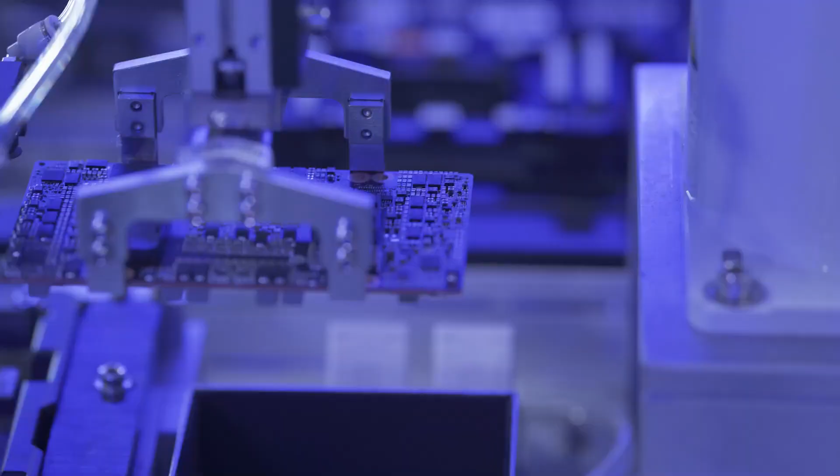Today, we're diving into Nvidia's unexpected push to build AI supercomputers and humanoid robots right here in the USA. Why is this such a big deal? Because these computers or robots aren't going to be built in China, but in the USA.

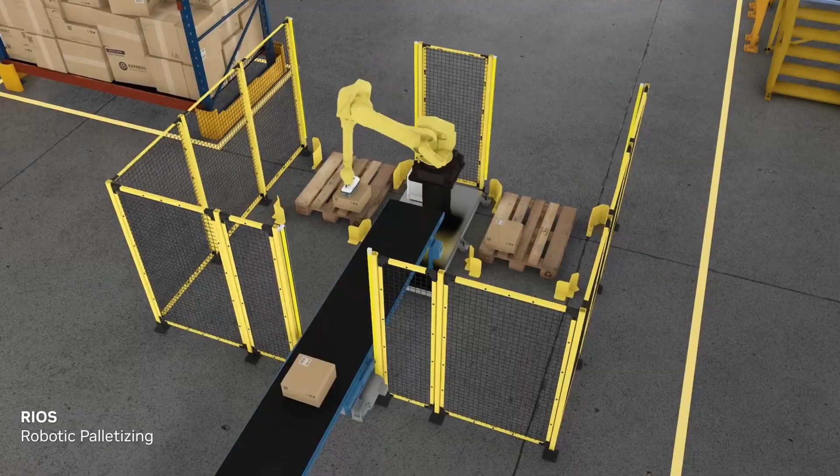Nvidia's AI supercomputers are the engines behind the world's most advanced artificial intelligence. And their humanoid robots are designed to work alongside us, not just in labs, but in real factories, offices, and maybe even homes. This move is about more than technology. It's about economic security, job creation, and global leadership.

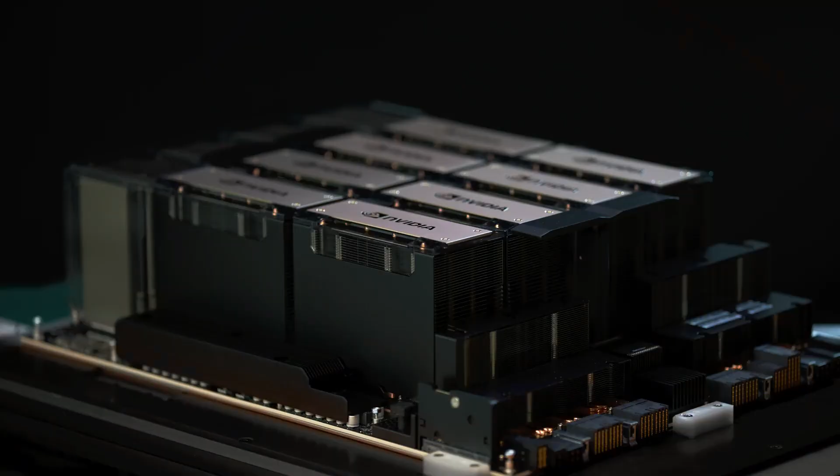Nvidia's plan is expected to create hundreds of thousands of jobs and drive trillions of dollars in economic activity over the coming decades. And for the first time, the engines of the world's AI infrastructure are being built on American soil. So what exactly is Nvidia building?

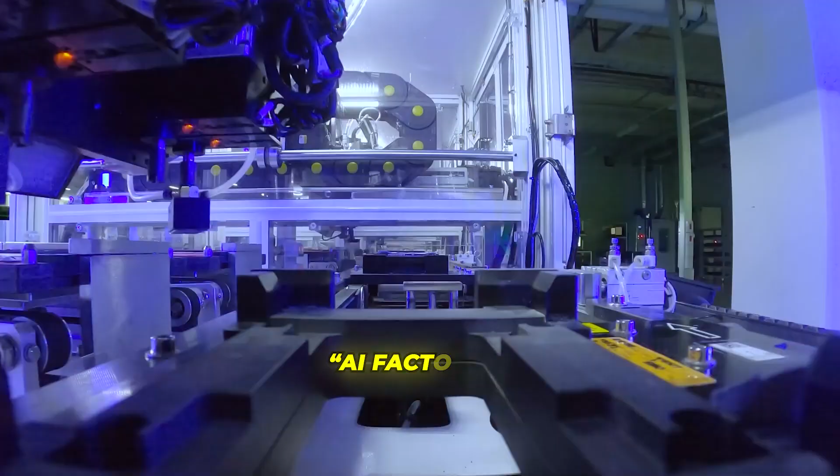Let's break it down. Nvidia is constructing massive manufacturing plants in Texas and Arizona. These aren't your average factories, they're AI factories, designed from the ground up to build and test the world's most advanced AI chips and supercomputers. We're talking about over 1 million square feet of manufacturing space, with mass production ramping up in the next 12 to 15 months.

These AI factories will use Nvidia's own advanced robotics and digital twin technologies. Imagine a factory where every process is simulated in 3D before a single machine is turned on. That's possible thanks to Nvidia's Omniverse platform, which creates digital twins, virtual replicas, of the entire factory. This means faster, safer, and more efficient manufacturing.

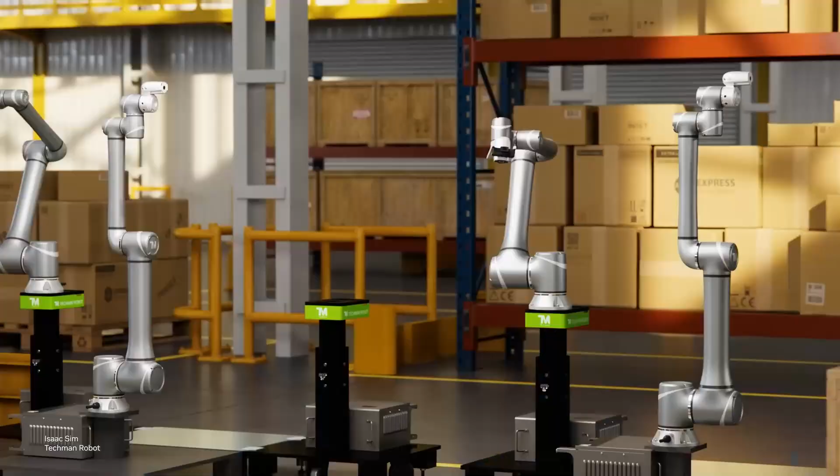But here's where it gets even more futuristic. Nvidia is using its own AI-powered robots to help build these factories. That's right, robots building the places where more robots and supercomputers will be made. It's automation on a scale we've never seen before.

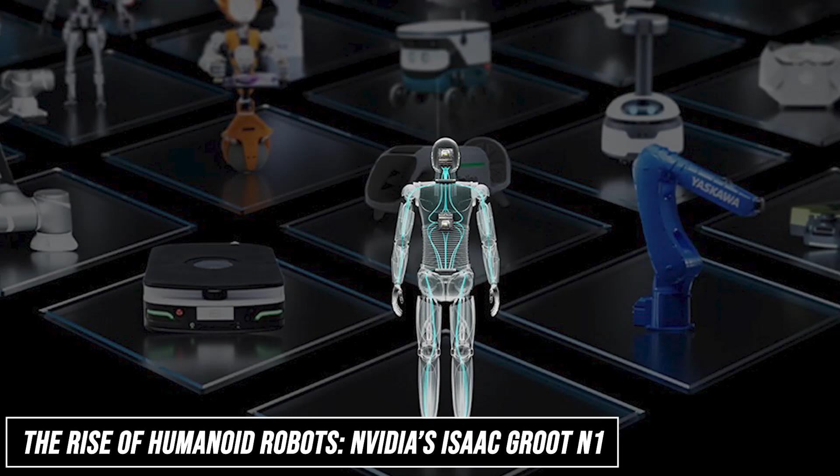Now let's talk about the stars of the show, humanoid robots. At Nvidia's recent GTC 2025 conference, CEO Jensen Huang unveiled the Isaac GR00T N1, pronounced Groot, the world's first open, fully customizable foundation model for generalized humanoid reasoning and skills.

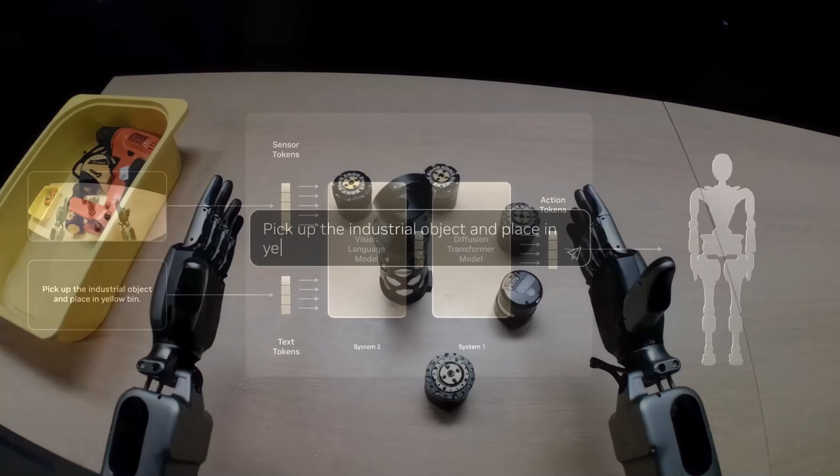What does that mean in plain English? It means Nvidia has created an AI brain that can power robots to learn, adapt, and perform a wide range of tasks, just like a human. This isn't a one-trick robot. It's a generalist, capable of everything from picking up objects to tidying a room and even performing complex multi-step tasks.

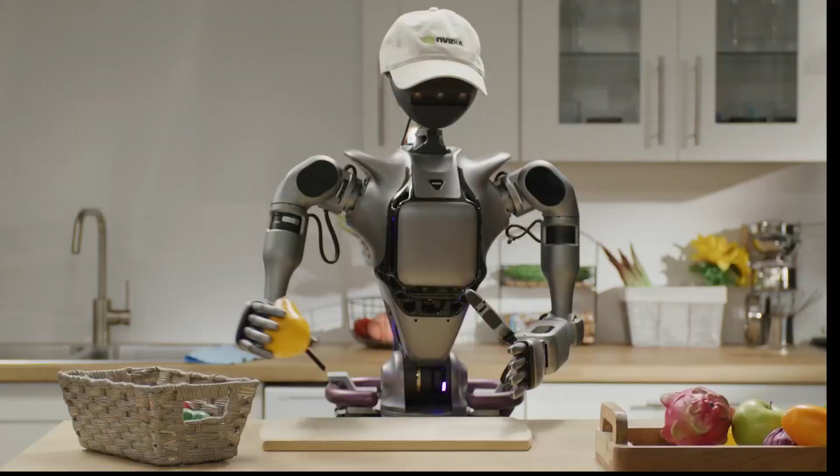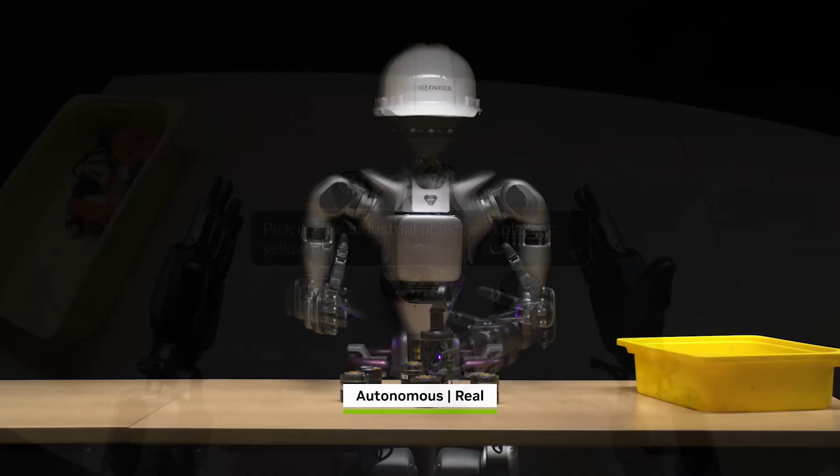The Isaac GR00T N1 model is inspired by human cognition, with a dual system architecture for thinking fast and slow. The slow thinking system gives robots perception and reasoning skills, helping them decide the right actions to take. The fast thinking system translates those decisions into smooth, coordinated movements.

This model is open and customizable. That means developers and companies around the world can use it to build their own robots, tailored to specific industries or tasks.

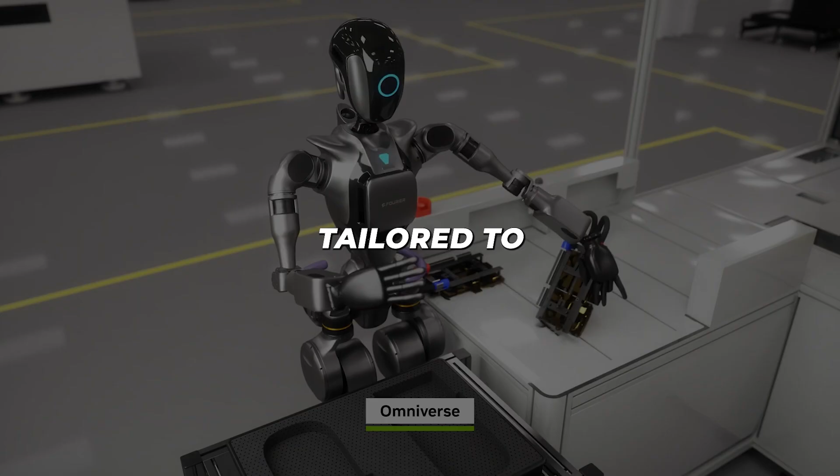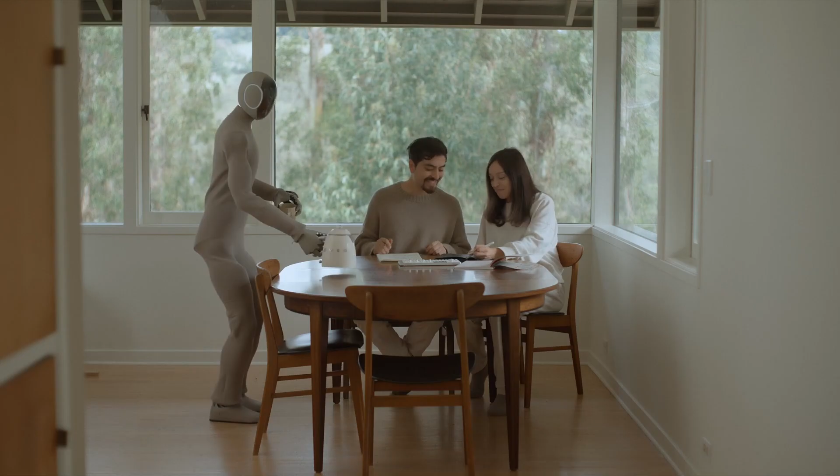So what can these robots actually do? At the GTC 2025 showcase, Nvidia demonstrated robots powered by the GR00T N1 model performing real-world tasks. One robot, developed in partnership with robotics company 1X, autonomously tidied up a room, picking up objects, organizing them, and even transferring items from one arm to another.

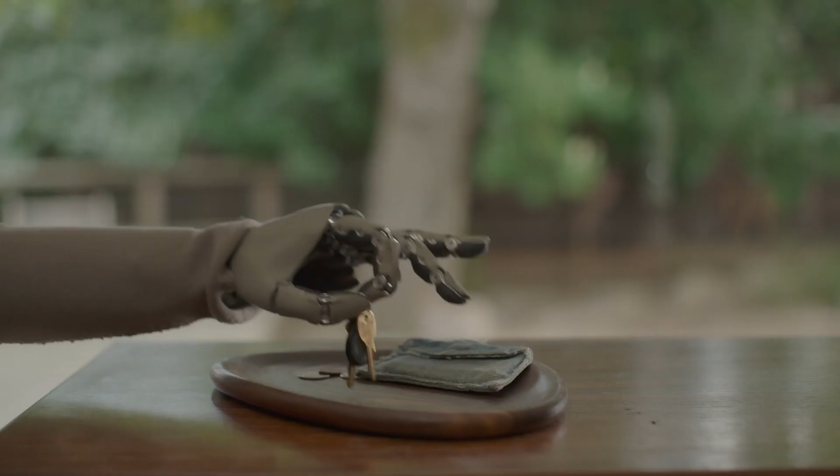But it doesn't stop there. Nvidia's robots are being trained to handle everything from material handling and transport in factories, to precision welding and even domestic chores. The goal is to create robots that can work safely and efficiently alongside humans, taking on repetitive, dangerous, or physically demanding tasks.

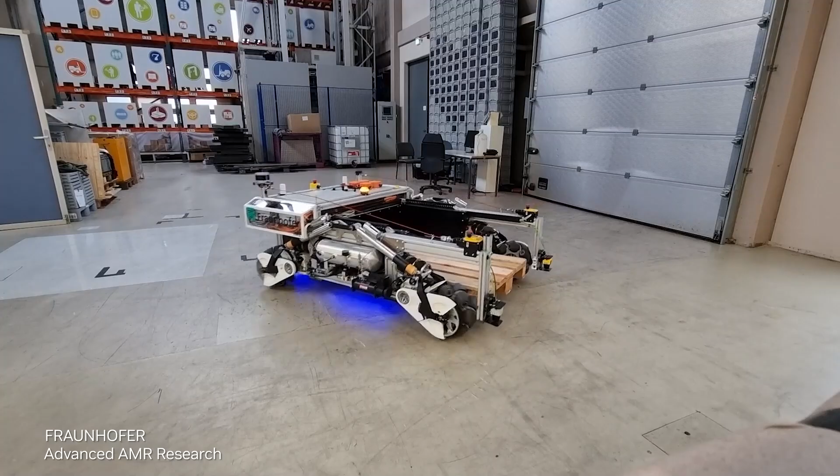And thanks to Nvidia's Cosmos platform, these robots can learn in hyper-realistic digital environments before ever setting foot in the real world. Cosmos generates synthetic data and simulates millions of scenarios, allowing robots to practice and perfect their skills virtually. This means faster training, fewer mistakes, and robots that are ready for prime time.

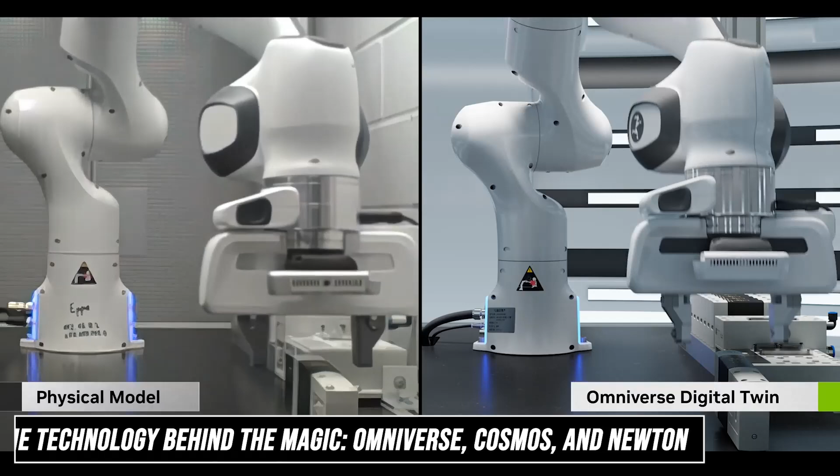Let's peek under the hood at the technology making all this possible. First up is Omniverse, Nvidia's real-time 3D collaboration platform. Omniverse is used to create digital twins of factories, robots, and even entire cities. This allows engineers to design, test, and optimize everything in a virtual world before building it in reality.

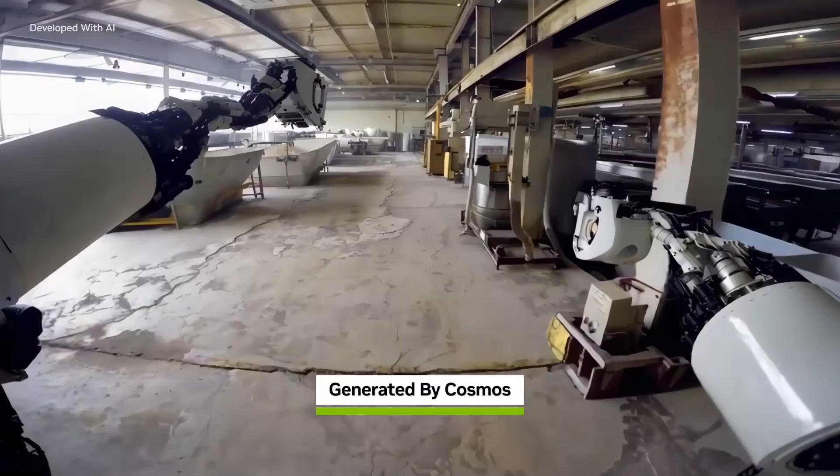Next is Cosmos, Nvidia's world foundation model for physical AI. Cosmos integrates various AI models and processing pipelines, enabling robots to understand and interact with their environments. It's like giving robots a sense of sight, touch, and even intuition.

And then there's Newton, an open-source physics engine developed in collaboration with Disney Research and Google DeepMind. Newton lets robots learn how to handle complex tasks with greater precision by simulating real-world physics.

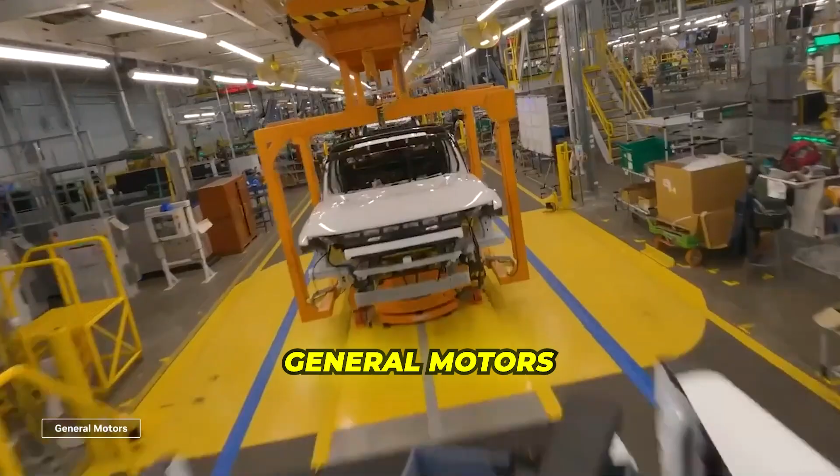Disney is already using this technology to create next-generation entertainment robots, like the Star Wars-inspired BDX droids. Nvidia isn't going it alone. They're partnering with some of the biggest names in tech and industry to bring these innovations to life. General Motors is working with Nvidia to bring AI to its factories, robots, and self-driving cars.

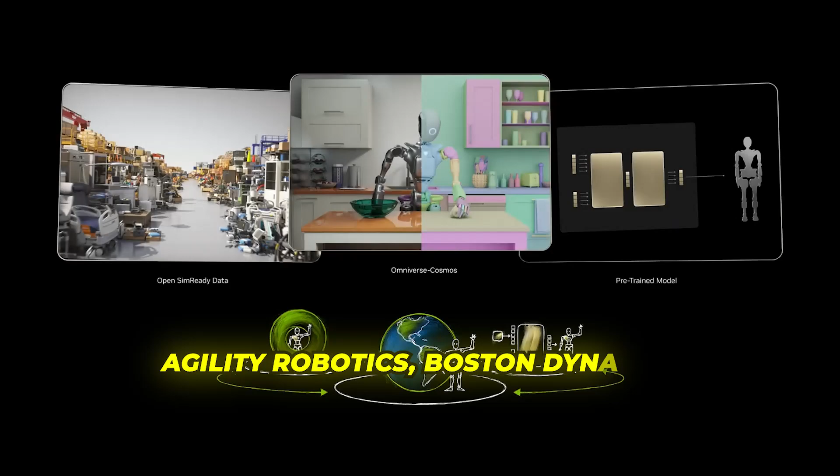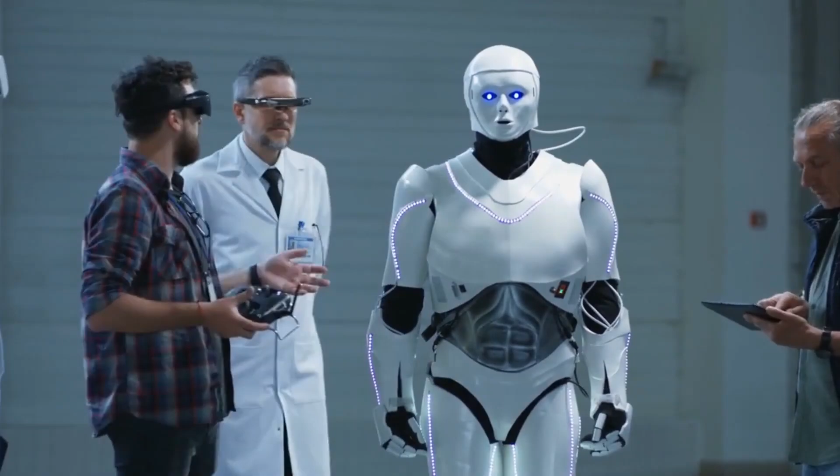Using Omniverse and Cosmos, GM can build digital twins of its assembly lines and train AI models to improve manufacturing processes. Disney is using Nvidia's Newton engine to create more expressive and engaging robotic characters for its theme parks. Agility Robotics, Boston Dynamics, Mentee Robotics, and Neura Robotics are all early adopters of Nvidia's GR00T N1 model, using it to develop robots that can walk, pick up objects, and interact with their surroundings more naturally. These partnerships are accelerating the adoption of AI and robotics across industries, from manufacturing and logistics to entertainment and healthcare.

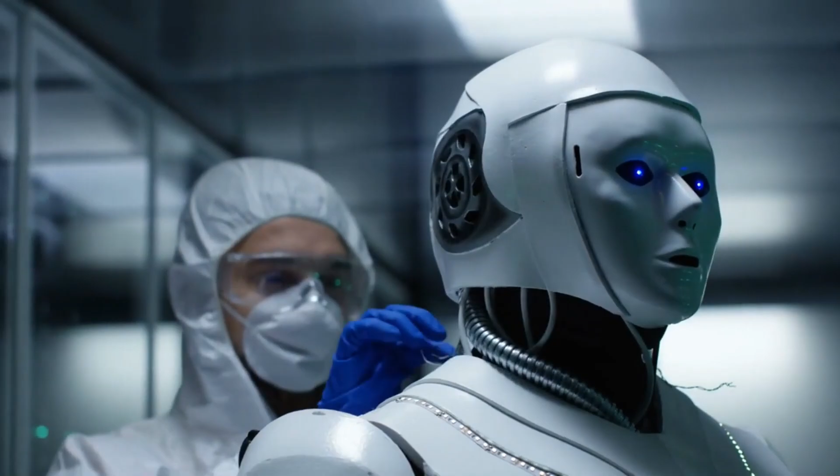Let's talk about what this means for the economy and society. Nvidia's plan to build AI supercomputers and robots in the USA is expected to create hundreds of thousands of jobs. These aren't just jobs in tech, they're in manufacturing, logistics, construction, and more. By bringing production back to the US, Nvidia is strengthening the supply chain and boosting economic security.

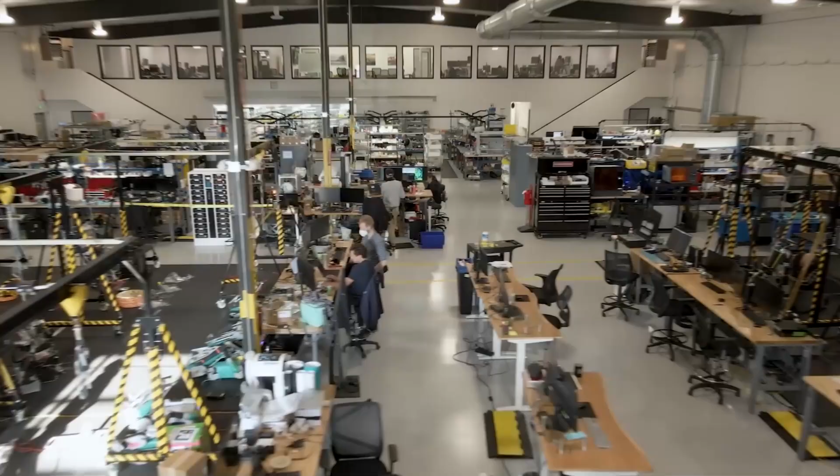But there's another side to the story: automation. As robots become more capable, they'll take on tasks that are repetitive, dangerous, or physically demanding. This could free up humans to focus on more creative, strategic, or interpersonal work. But it also means we'll need to adapt, learning new skills, and finding new ways to work alongside our robotic colleagues.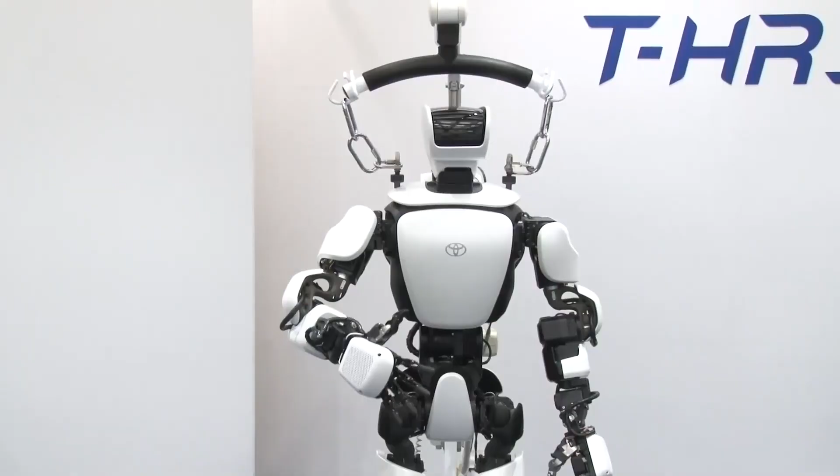Nvidia's CEO Jensen Huang has said that the ChatGPT moment for general robotics is just around the corner. In other words, we're about to see a surge in the adoption of robots, similar to how AI chatbots exploded in popularity. The manufacturing sector is expected to be the first to adopt humanoid robots, thanks to its structured environments and well-defined tasks.

So what's next for Nvidia and the world of AI robotics? Tens of gigawatt AI factories. Nvidia plans to build tens of massive AI factories in the coming years, each one powering a new generation of data centers dedicated to artificial intelligence.

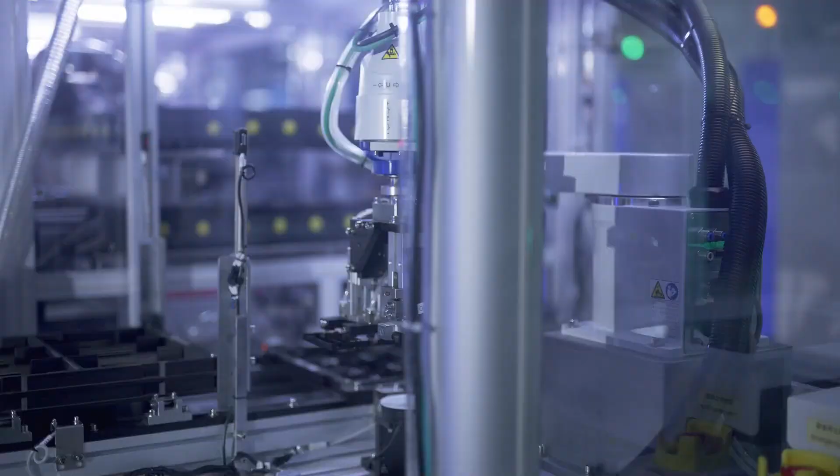$500 billion in AI infrastructure. Over the next 4 years, Nvidia aims to produce up to $500 billion worth of AI infrastructure in the US, in partnership with companies like TSMC, Foxconn, and Wistron.

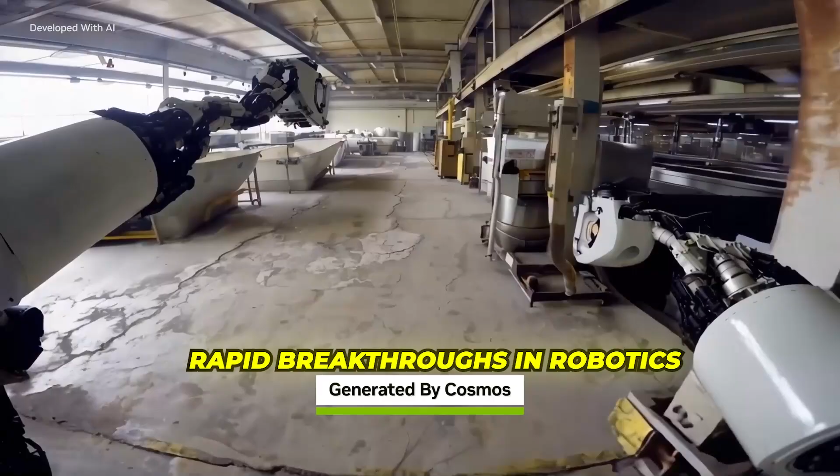Rapid breakthroughs in robotics. With tools like Omniverse, Cosmos, and GR00T N1, Nvidia is setting the stage for rapid and surprising breakthroughs in general robotics. We could see humanoid robots become mainstream in factories within just a few years, not decades.

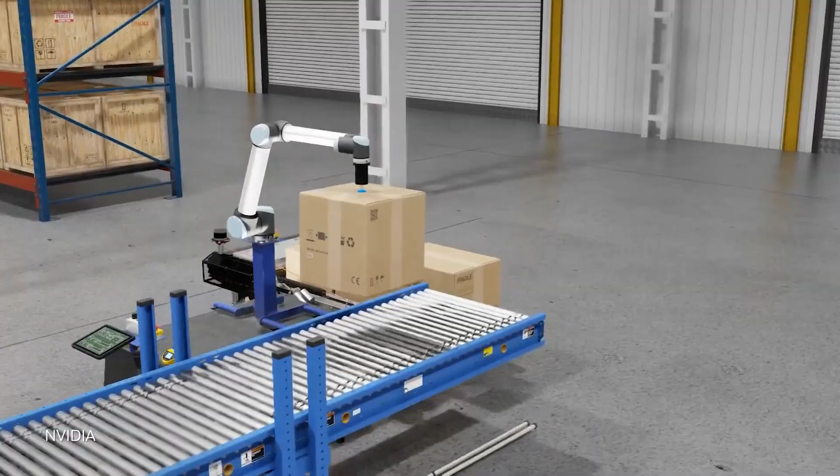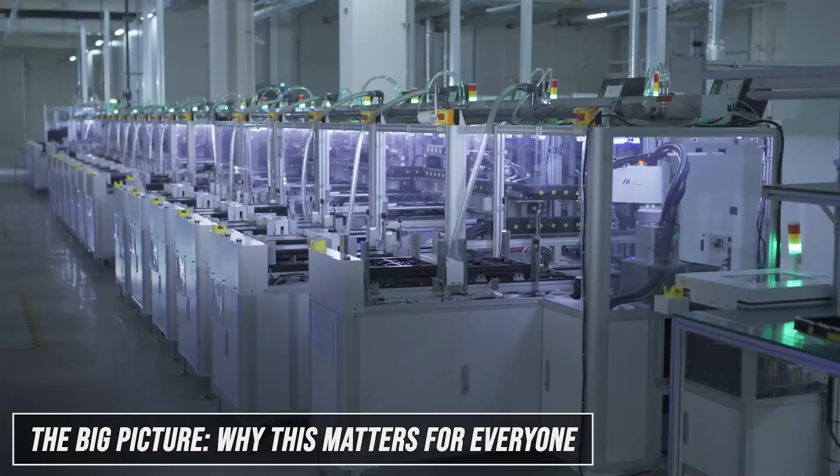Personal AI supercomputers. Nvidia is also working on personal AI supercomputers, making advanced AI accessible to researchers, developers, and even small businesses. Let's zoom out. Why should you care about Nvidia's robots and supercomputers? Because this isn't just about technology, it's about the future of work, the economy, and even our daily lives.

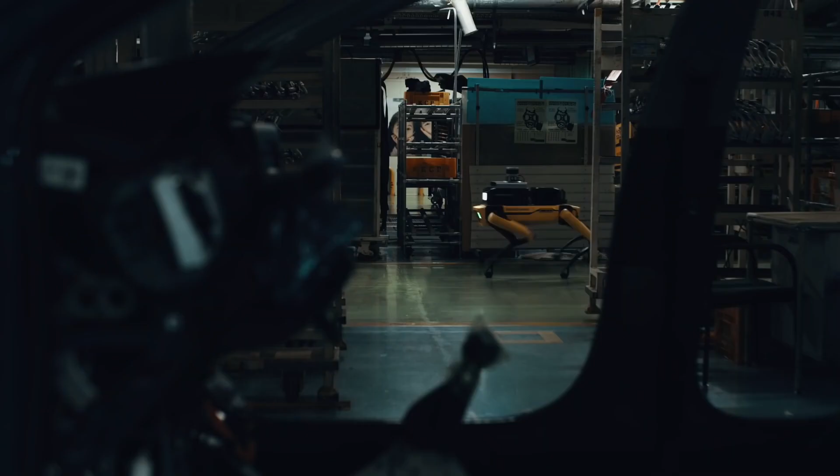Imagine a world where robots handle the dangerous and boring jobs, freeing up humans to focus on what we do best. Imagine factories that are safer, more efficient, and more resilient. Imagine new industries and opportunities that we haven't even dreamed of yet.

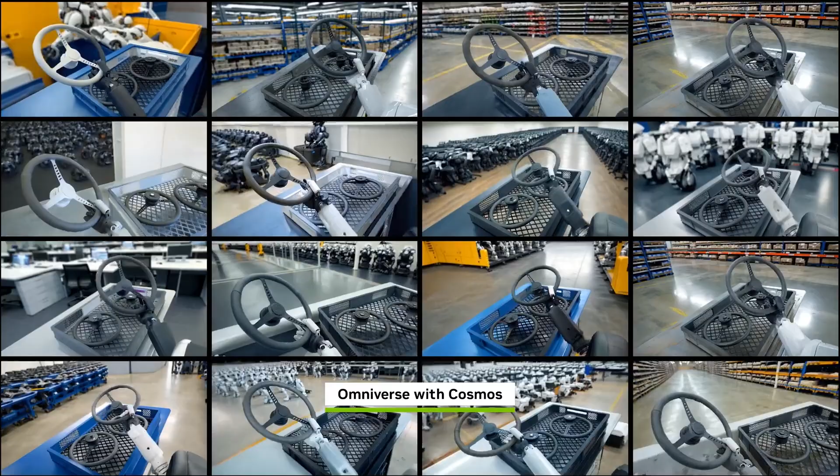Nvidia's push to build AI robots and supercomputers in the USA is a bold bet on the future. It's a bet that America can lead the world in the next wave of innovation. And it's a bet that robots and humans can work together to build a better, more prosperous world.

We're standing at the edge of a new era. The age of generalist robotics, robots that can learn, adapt, and work alongside us, is no longer science fiction. It's happening now, and Nvidia is leading the charge.

Nvidia's latest breakthroughs are making what once seemed impossible a reality. Their Isaac GR00T N1 model is now powering next-generation humanoid robots, giving them the ability to perceive, reason, and act in ways that closely mimic human cognition.

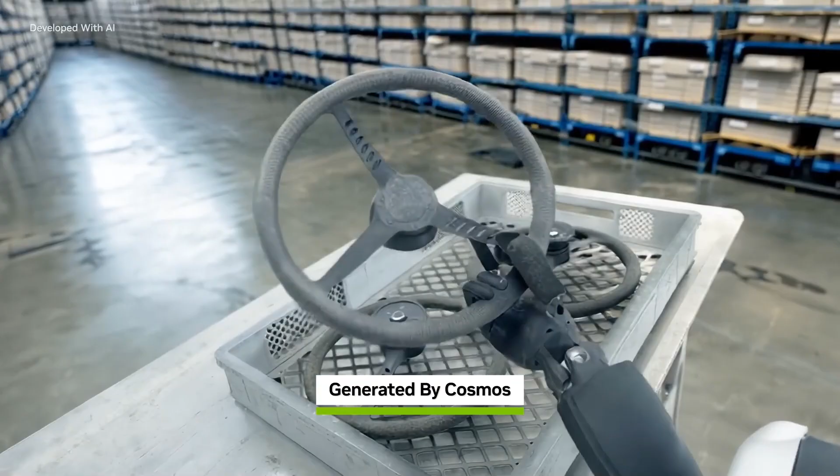These robots aren't just limited to simple, repetitive tasks. They're learning to adapt, solve problems, and interact naturally with people. With advancements like the Jetson Thor platform and open-source simulation frameworks, Nvidia is enabling developers everywhere to build robots for real-world jobs, from factories to healthcare.

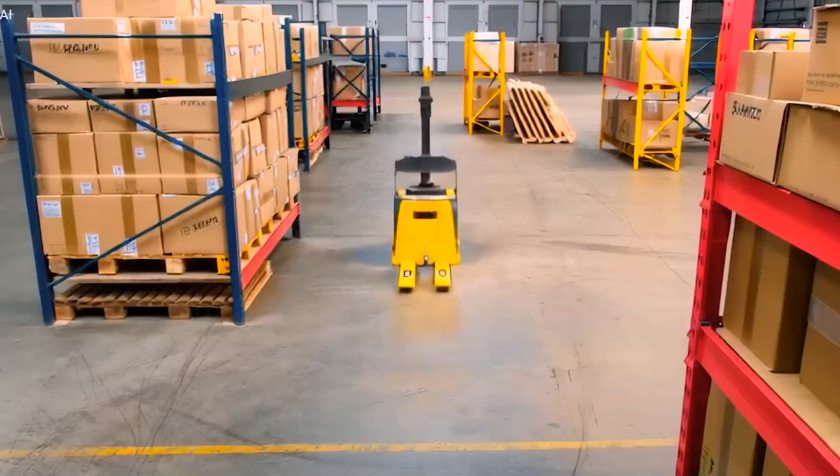The company is focused on being the brain behind robotics, partnering with manufacturers to accelerate innovation. As mass-produced, general-purpose robots become a near-future reality, we're witnessing the dawn of a workforce where humans and intelligent machines collaborate side by side, reshaping industries and daily life.

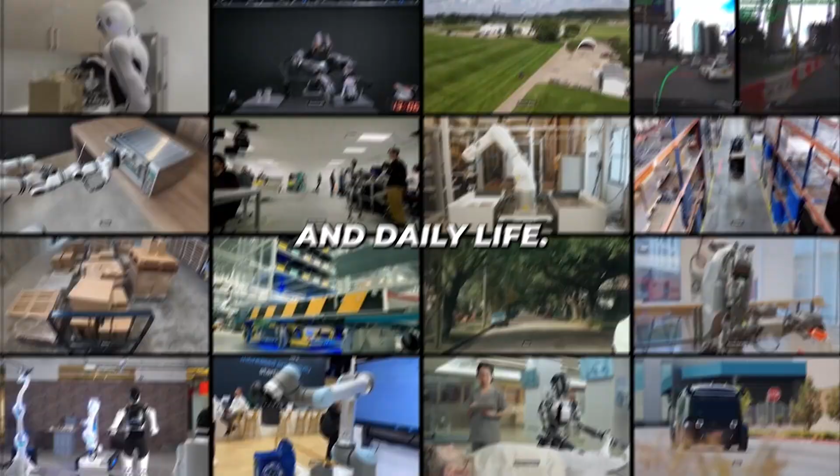Donald Trump's focus on making everything made in America may also force other US companies working in China to start building more robotic innovations with USA. This might be the turning point for US robotics.

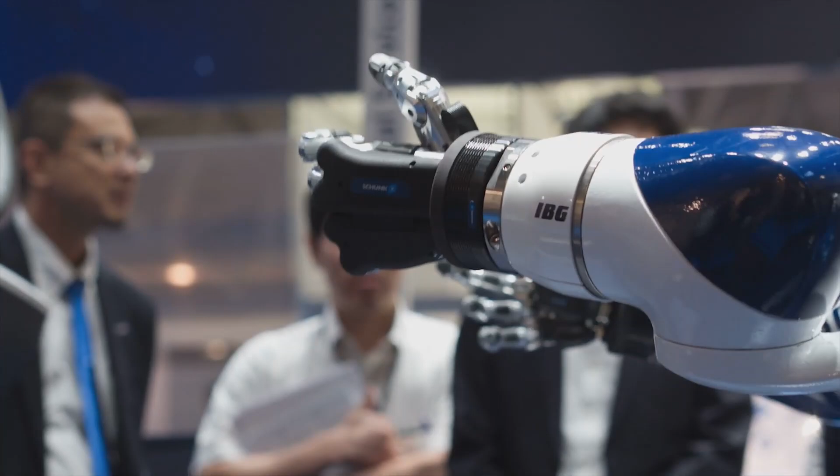Whether you're excited, curious, or even a little nervous, one thing is clear. The world is about to change in ways we can barely imagine. And it's all starting with a few factories, a handful of robots, and a vision that's as bold as it is inspiring.